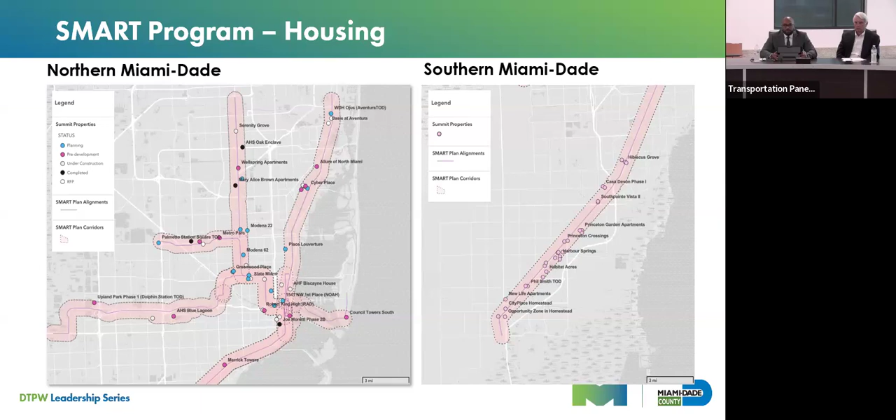That's why we are very much excited about this project. As we begin to erect these stations, our community is feeling that this is a different project than perhaps what they anticipated. 14 stations are across this 20-mile corridor, and we will be accepting the stations starting next month, at a batch rate of about 5 stations every 3 or so months over the next 12 months, finalizing the construction phase of the project. At this point, we are anticipating that we'll be in revenue service by the first part of 2025.

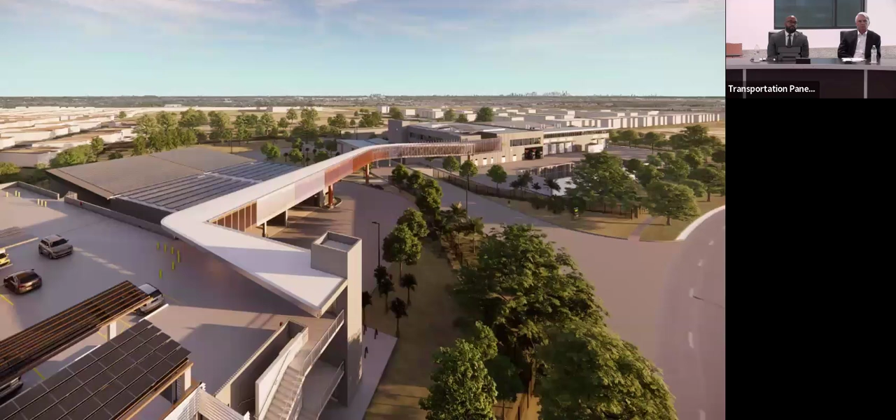As backup, a lot of times we also focus in on just the BRT system itself and the stations we are building, but we have supportive infrastructure as well. We have an intermodal facility that will provide greater connections to the existing elevated Metrorail system we have in Dadeland, and we are also building a major new facility.

A $245 million innovative all-battery electric bus operations and maintenance transit center in the southern part of the county. We have a piece of property, 47 acres in the southern part of the county, that was granted to the county from the Air Force Base, which we are required to repurpose as an economic development project opportunity. This was the property and use we decided to place this new transit operations center, which will allow us to build a state-of-the-art facility.

This is an image of that particular facility. This will house all of the vehicles that will provide service along the South Dade Transitway, which will have 100 sixty-foot articulated buses, all electric, operating the BRT service. This will be the first time we will have 20 miles of BRT, and there's no other BRT service of this length that's all battery electric operated in the country.

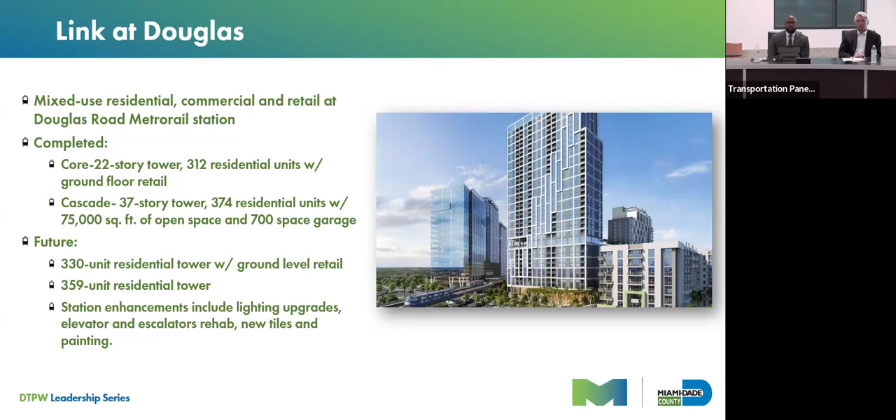That's a quick overview of the BRT project. I do have another video that will show the actual operation our customers will experience, and you'll get a better feel for the user experience of our BRT system. We're excited about this project and the fact that we consider ourselves a leader here in Miami, and I believe this can really be an opportunity for the Charlotte area and region to truly consider BRT as a true high-capacity transit mode that will satisfy demand from all the residents here within Charlotte.

We're excited about our project. We're keeping this project on time and on budget, and our design builder has done an excellent job moving forward with our stations and all the supportive projects along the corridor. So I think what's up next is a presentation with a video overview of the overall operations, and I'll be able to explain some of the details.

As I pull this up, to give more detail, along all of the intersections on this corridor we actually have what's called signal preemption, as well as traffic signal priority. So we've upgraded our signal system to mimic what you'd experience on a light rail corridor, where the vehicle itself, our articulated 60-foot bus, will go through intersections and not have to stop at the lights during peak periods.

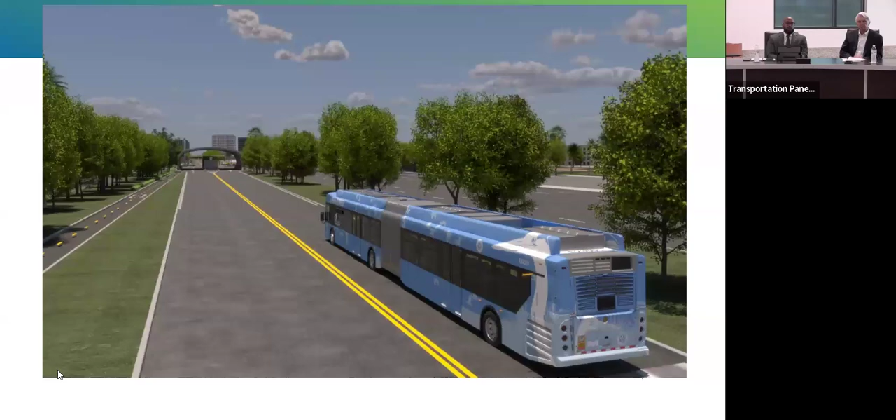So this is the operation here, and we do have a voiceover and sound, but it's closed caption, and you can get an idea of how this system is going to operate.

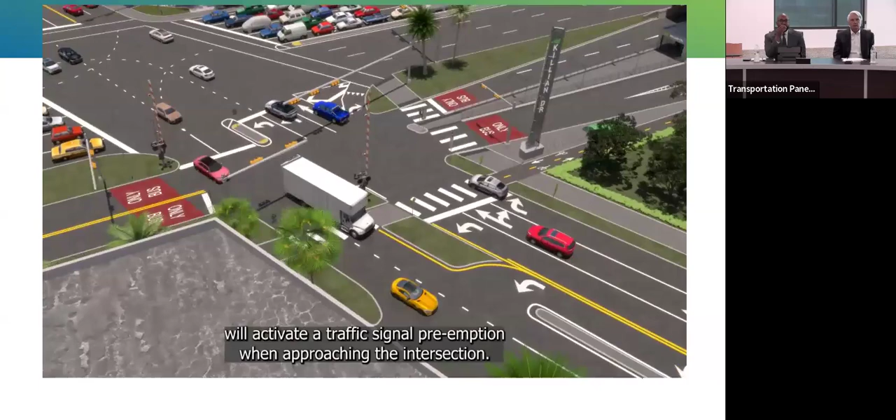The bus right now is pulling into our iconic station, showing the customer experience as individuals walk into our air-conditioned vestibule down the center of this station. We have fare gates where customers pay before entering the air-conditioned vestibule, and they'll wait for their bus in this area.

There's traveler information on the screens above the entranceway to the platform. As customers enter, the platform is level boarding, very similar to what you'd experience in a rail-type system. Our Metro Express bus, a 60-foot articulated battery-electric operated bus, pulls up to the platform, and individuals walk out seamlessly and onto the bus. This provides a similar experience to what you'd have in a light rail system.

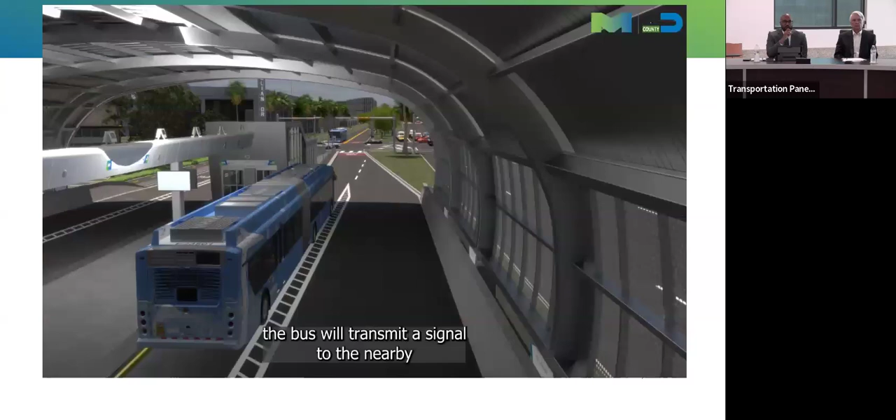It will have very minimal dwell times for our bus operators as they wait for people to board. As customers board the bus, they leave the station.

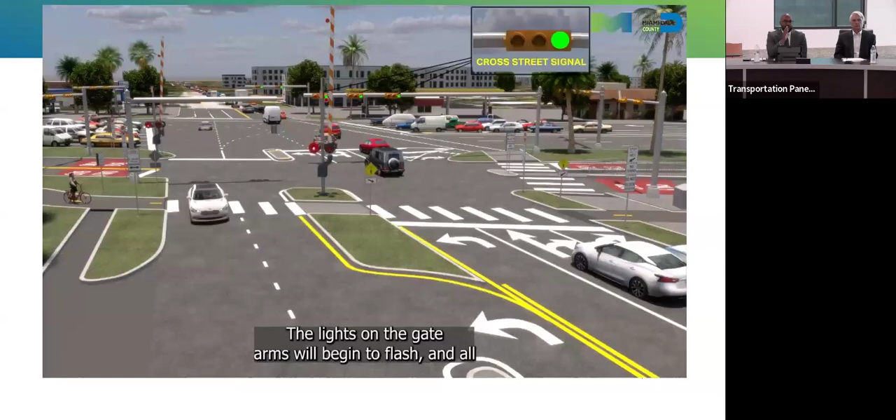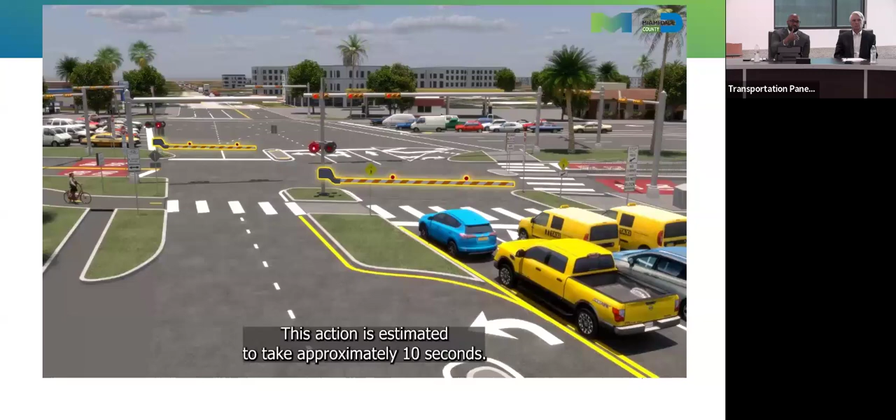This is showing the preemption phase of the signals. As the bus goes through the intersection, the gate arms come down once the signal is activated, providing an additional safety feature to prevent cars from moving on cross streets across the transit way. This all happens while the bus is moving, so it doesn't have to stop at specific intersections, and it proceeds through at the same rate of speed, moving on to the next station.

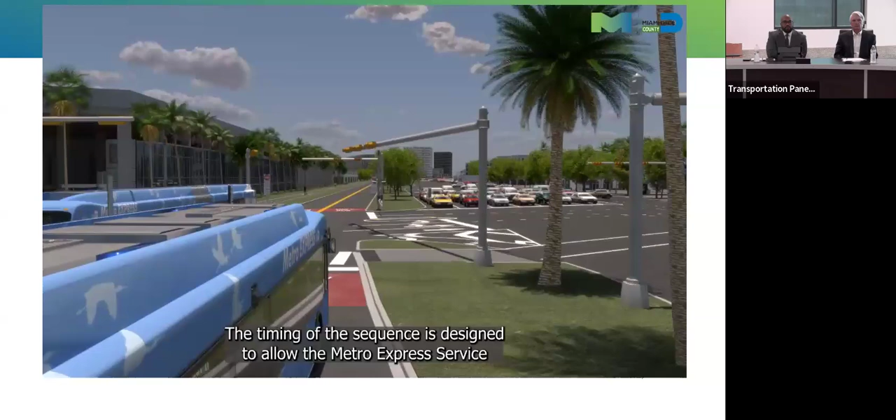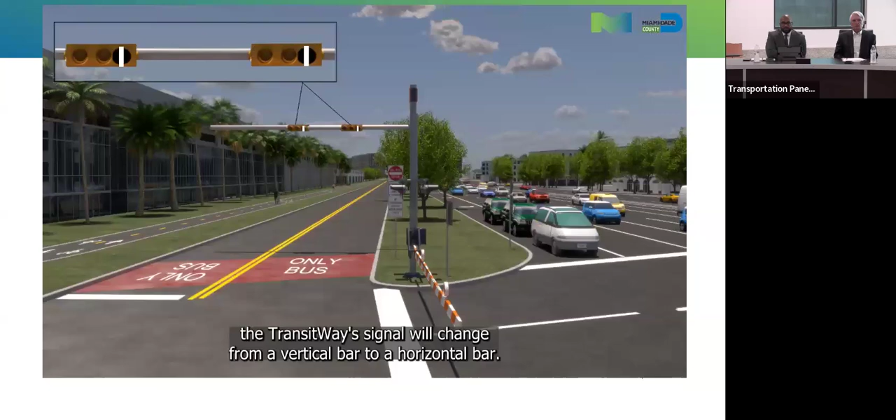So this is called preemption, traffic signal preemption. Essentially, preemption allows the bus to not stop at the intersection with these safety features. The roadway you see to the right is actually a state roadway, US 1, one of our heavily traveled corridors throughout the county. That's the video showing the full operation and how our customers will be able to access our system.

So Eulois, thank you for that. It seems like there are so many similarities to what Charlotte is thinking about in terms of the Silver Line East route, which was originally envisioned as light rail.

BRT, Bus Rapid Transit, that term has been around for decades, and it means a lot of different things to a lot of people. For some, it's the vision of the bus they see on the roads today. What you're showing us is something that looks a whole lot better than that. What was the reaction in your community when they first learned this is what was envisioned for this particular route?

As with most things, people were a little skeptical when you say bus or bus rapid transit. As we've gone out and actually shown the imagery and videos, had additional conversations, and the structures have been erected, people's thoughts about the project have changed. They realize this isn't what perhaps they thought, which unfortunately sometimes is just a little bit of an improved bus stop. These are truly stations, and that's why we call them BRT stations, because they operate as such.